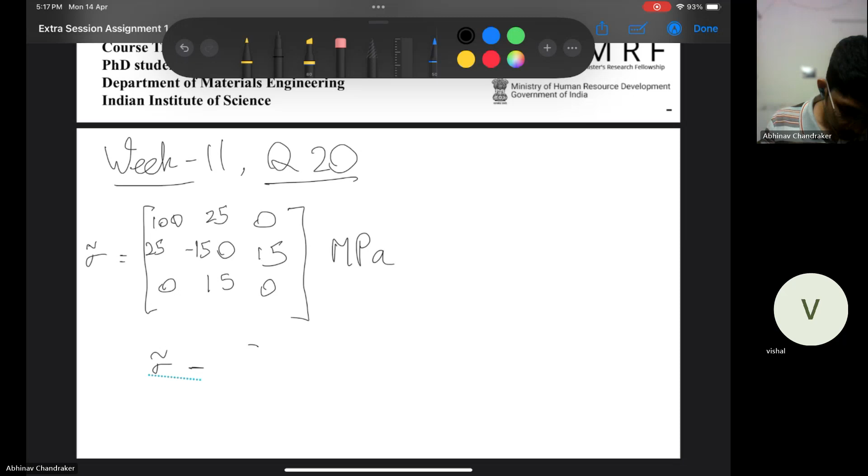Let me denote it by this. Sigma into I, equal to 0. What I was saying is you have to be able to get the principal stresses from this.

You need to make this matrix of 100 minus sigma. Let me make it bigger. And the determinant for this should be equal to 0.

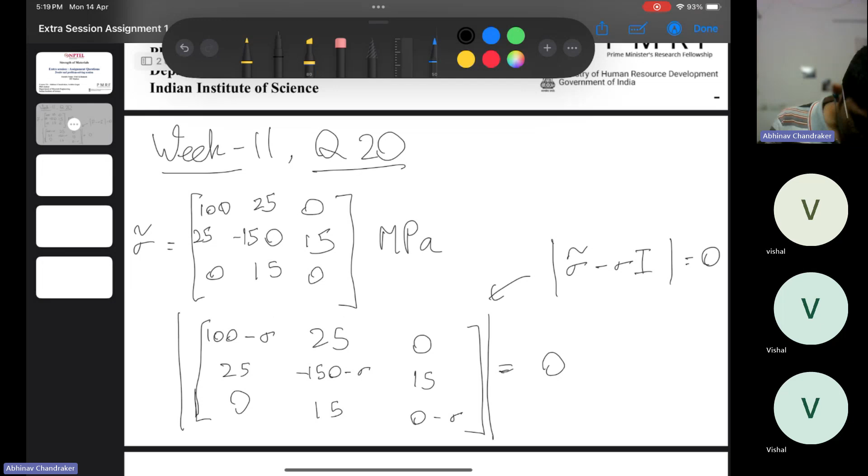From this, you will get a cubic equation which you will have to solve. Is there any doubt? Voice is breaking, Vishal. Okay, no doubts.

Let me quickly go to what that equation is, won't solve it directly here. So it is sigma cube minus sigma square into sigma xx plus sigma yy plus sigma zz.

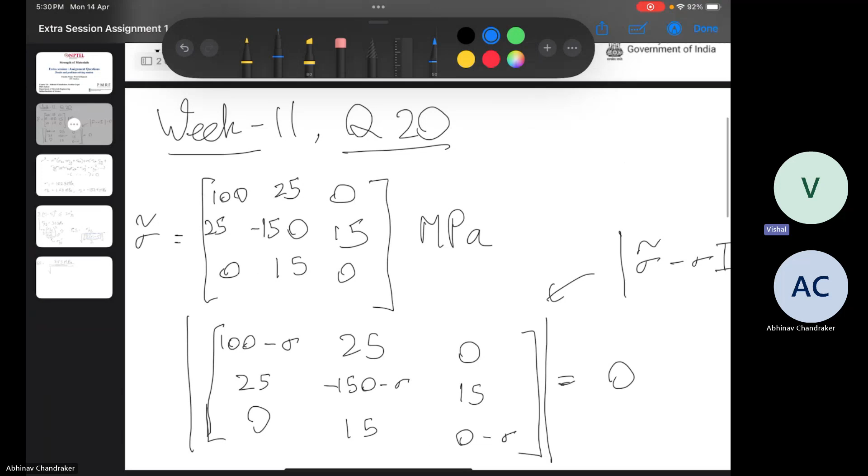Let's just do it again, let's see. Sigma 1... Vishal, did you also use a similar formula, or did you use a different one? I think the one you told was different, right? No sir, it was the same formula, this one only. So we have to do, in the place of sigma 1 minus sigma 2, we have to do all the three: sigma 1 minus sigma 2 square plus sigma 2 minus sigma 3 square, as there is in their formula. If we expand, hmm.

Okay sir, have you solved this question? I had actually calculated principal stresses, I did not check the von Mises myself. Now I am just adding it up, I'm doing the calculation. Okay sir, let's see whether it matches or not, let's see.

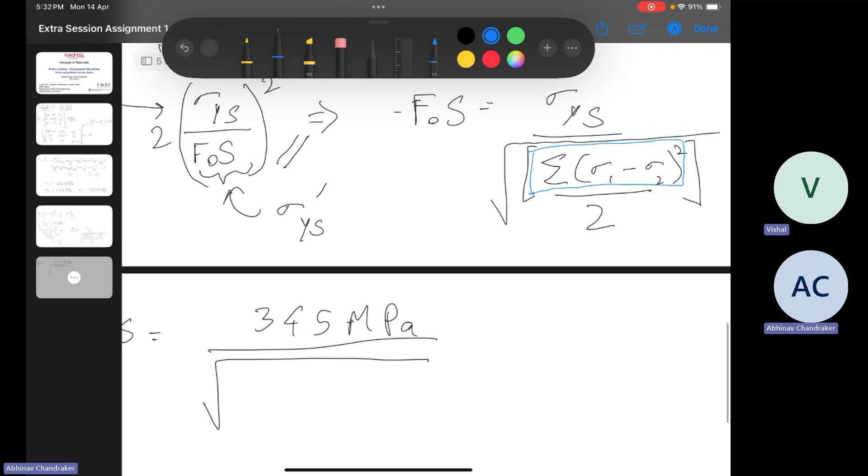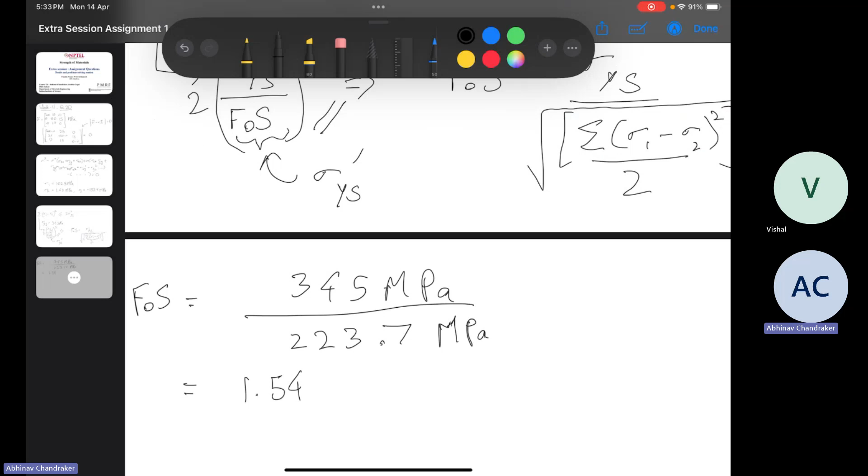So I'm getting it like this. Root of what I'm getting is 345 divided by 223.7. So this will become MPa. 345 divided by 223.7, 1.54. Is this the answer? Yeah, yeah. So I'm getting the correct answer only.

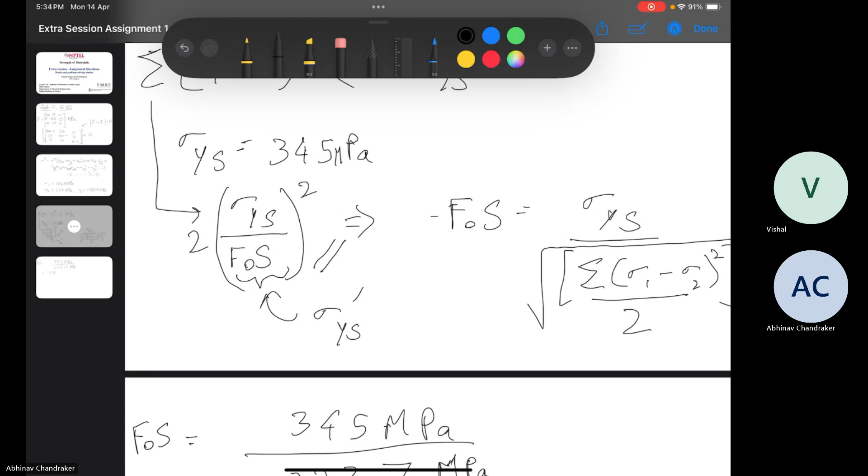Vishal, you are there? Yes, sir. So can you just check if this was the equation you used? Maybe you used some different one for your calculations. Sir, I used the same equation, but I got 2.18. Okay. I think I might have done wrong in using the calculator. Calculation issue might be there. Yeah. I'll quickly just write clearly what formula I'm using. Then maybe you can later check your calculation again. Okay, sir.

My laptop is on again. It had crashed.

Sir, my question is, while finding the three values of that characteristic equation, the three principal stresses, how will I do this in the exam hall, because there is no calculator. So are you allowed to take a scientific calculator for your NPTEL exam? No, sir. Only TCS calculator. Okay, the simple one, no? Okay.

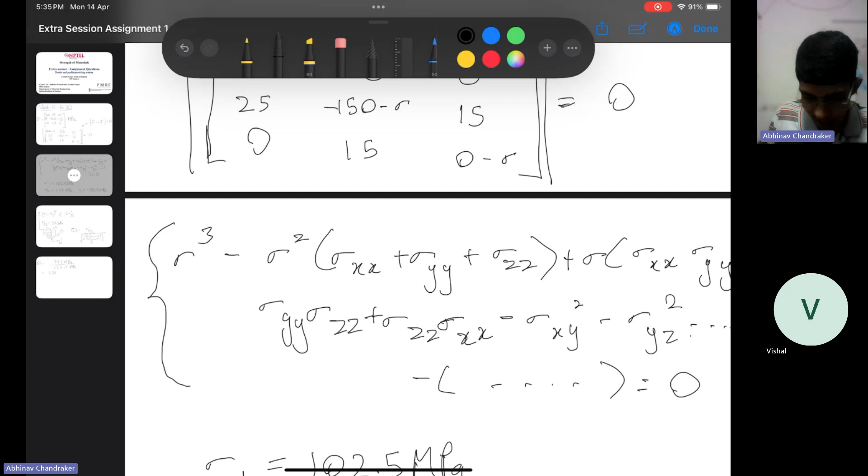Yes, sir. So actually this equation cannot be solved directly by hand. I also tried a bit. Then I had to use some online computational, like scientific calculator only. I think they won't give this kind of equation if they do not provide a calculator. They'll give you a simpler cubic equation where you can just input some guesses and find out the roots of that equation. Then you can do your calculations. Mostly they will not give you this kind of difficult cubic equation.

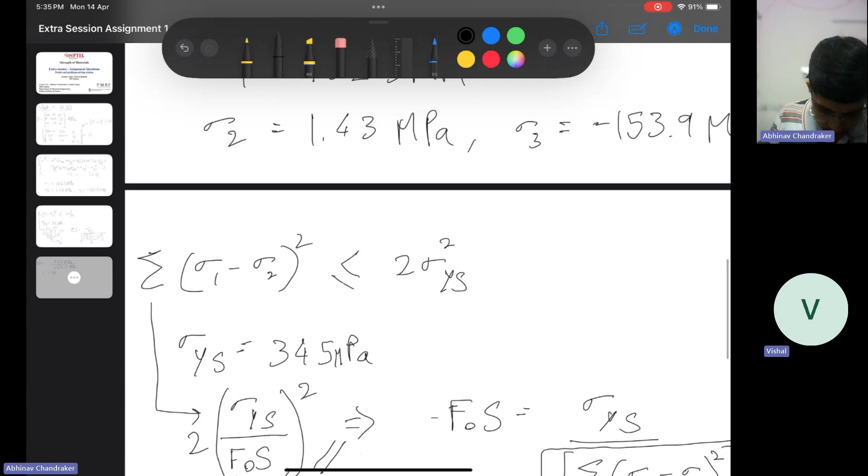So let me just simplify what I did. I directly wrote the equation here, so maybe some others might find it confusing. So what I did was, here you have sigma 1 minus sigma 2. This is your usual yield criterion for von Mises, 2 into sigma y square. If this is satisfied, that means it's at the edge of the yield surface. If the sum of sigma 1 minus sigma 2 whole square is more than this, then it will yield.

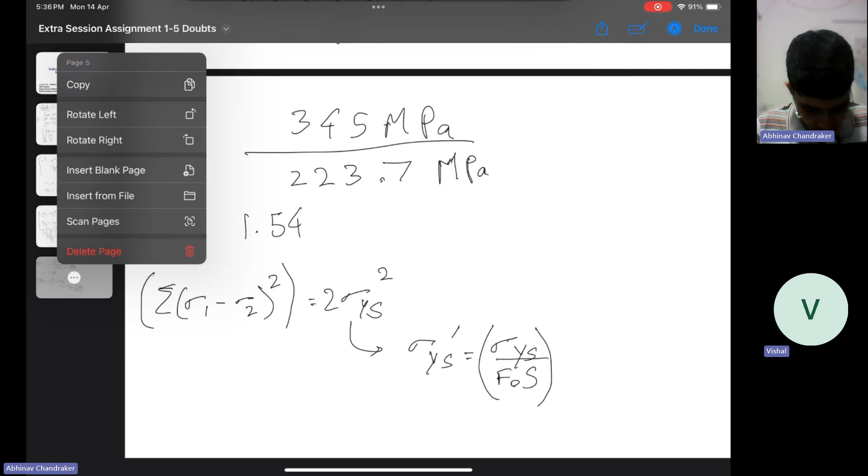But here, instead of sigma ys, we have sigma ys dash, which is a reduced value of yield strength, reduced by the factor of safety. And then once we put this value of sigma ys, we'll just do the calculations. That was all. So if this is fine, I'll go to the next question.

Yes, sir. Next question is week 8, question 8. Vishal, you only had asked these questions, is it? Yes, sir. Okay, okay. Then good that you are attending. In case you have any doubts, we can discuss on that.

So week 8, question 8, Archita also told me about this question. So here you have bending taking place, and the cross section after bending becomes like this for your beam. And it is asked what kind of stress is being experienced at the top. So I think there's some issue with the answer key for this. The correct answer should be tensile, because even in lectures, sir has taught that you will have a kind of deformation of your cross section when you do the bending of a beam. At the top, it will be something like this, and it will be tensile.

So I'll confirm with the TA who is in charge of all of these answer keys. So he'll take this up. In case of any clarification, we'll post it in the discussion forum. But very likely the answer is tensile for this. I'll confirm with the TA in charge.

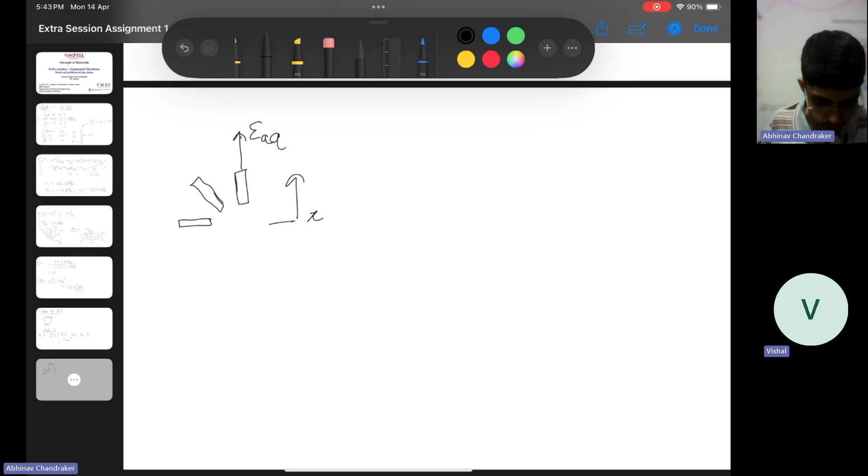Let me just write down. Epsilon a is in this direction. The measurement is in this direction. And this is x for us. This is y. This is epsilon c. Now we want to know epsilon xx. So for this, we have to do some transformation of the stress states.

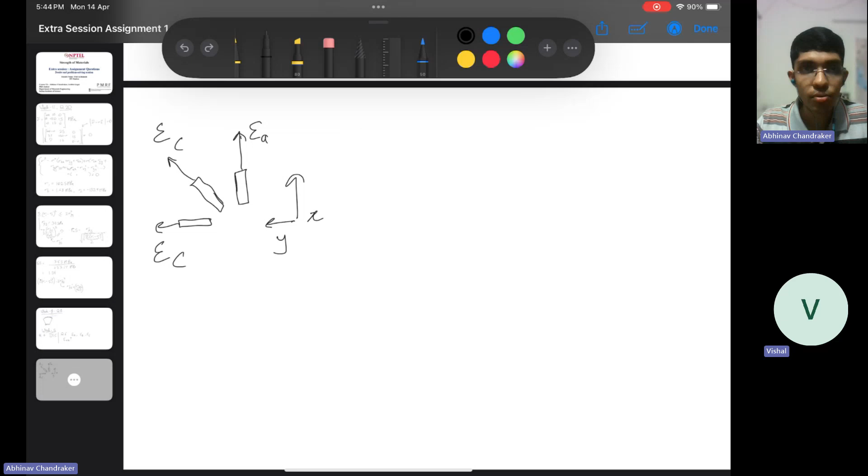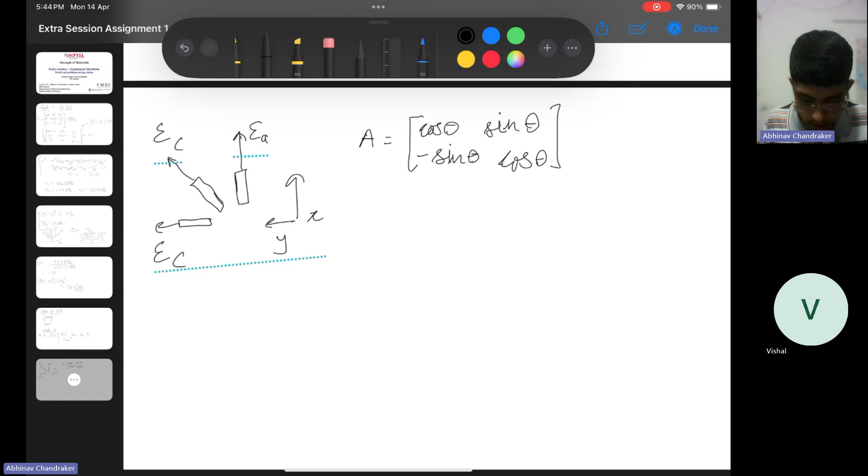Sir has shown it in his video lecture, so I'll quickly go to that. So it's something like this actually. You have cos theta, sin theta. Let's say this is equal to A. So how do we do stress tensor transformation when we are moving from one coordinate axis to another? If your initial stress tensor was sigma and your new one is sigma dash, then it will be A transpose into sigma into A, and here you are rotating by an angle of theta.

So same will be for strain. If the strain tensor needs to be transformed to a new coordinate system which is at an angle theta, then you do A transpose epsilon into A. And sir has already done the derivation, and he has shown that epsilon x will be equal to your epsilon A, and epsilon y will be equal to epsilon B, and your tau xy will be a function of epsilon A, epsilon B, and epsilon C.

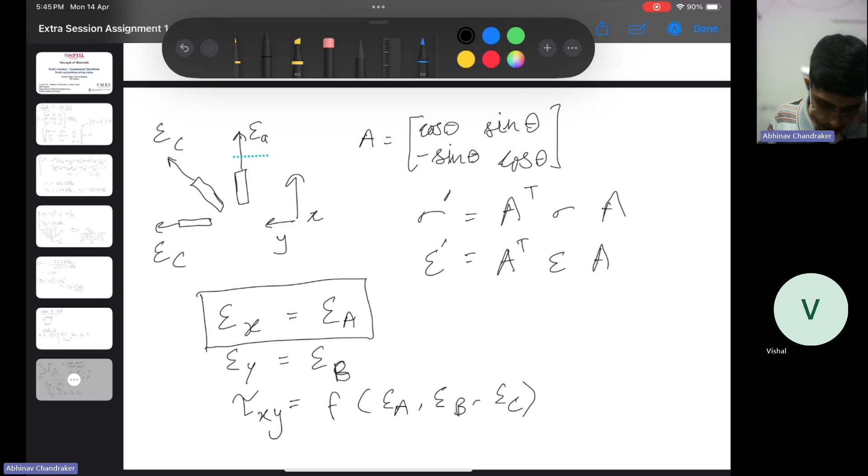Here we have just been asked what is epsilon x, right? So it will be the same as epsilon A. So the value will be 160 micron. Makes sense? And this is equal to 160 micron. If it is fine, I'll move to the next question. Sir, we have to find a strain. What is it we have written at the end? Tau xy. Yeah.

So normally, if you have any tensor, let's say you have a tensor like this, epsilon x, epsilon y, and here, sorry, tau means stress actually. I should write gamma here instead, or let's say epsilon xy. We are looking at strain components, so epsilon xy. So sir has shown a formula, and according to that, epsilon xy will be a function of the strain values you are getting at A, B, and C, and you are looking at components in particular directions, right?

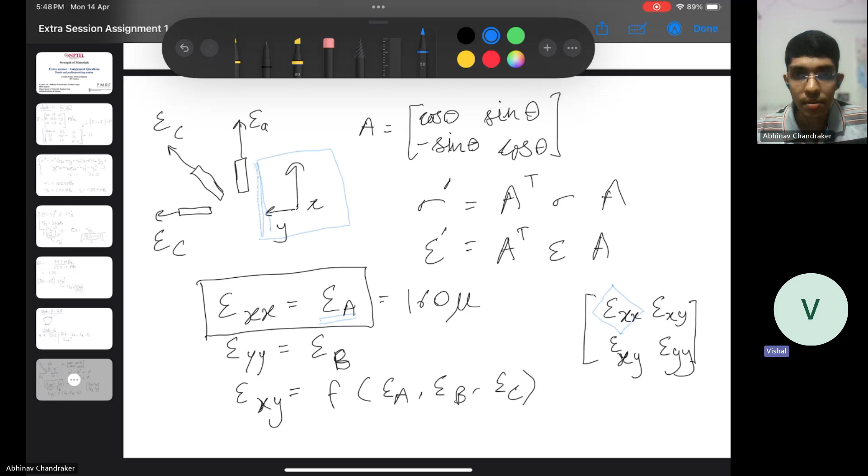And sir, if we are asked to find epsilon xy, then we have to find the function of epsilon a, epsilon b, and epsilon c. How will we do that? Okay. How we do that? So let me just go to the portion in the slides which has this. You can see my window. So this is week 5 content.

Sir, your window is not visible. Now you can see? No, sir. Okay. Sorry, I think I didn't get it. Now I hope it will be visible. Yes, sir, it is visible now.

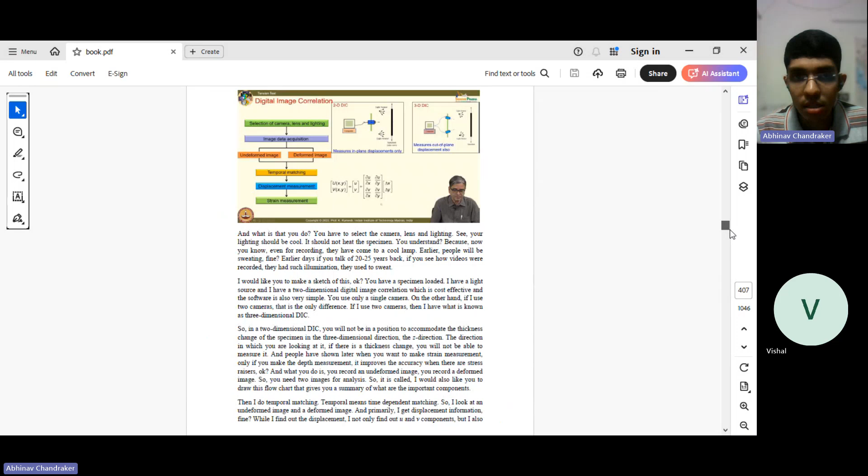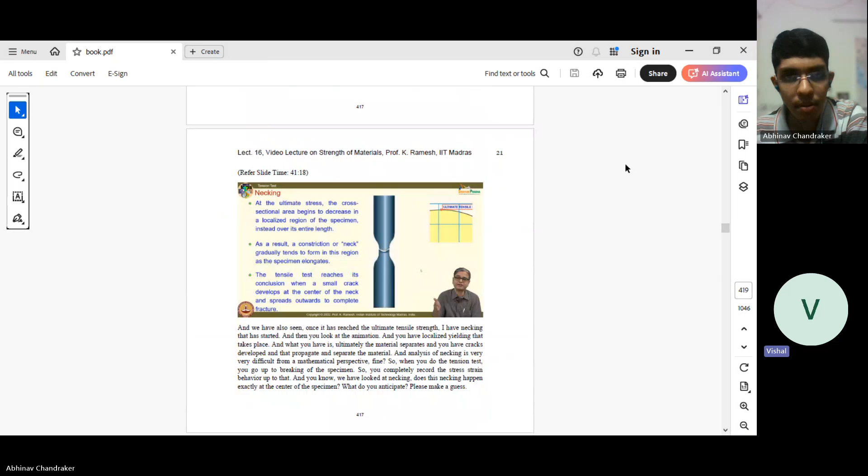So we go to strain measurement lecture. Lecture 15. I'll just write it down here. And here if we see, sir has done the derivation of how you can calculate gamma xy or epsilon xy. So it should be somewhere here. Relations. Strain gauges. Okay, it's not in this. I think it's in this one.

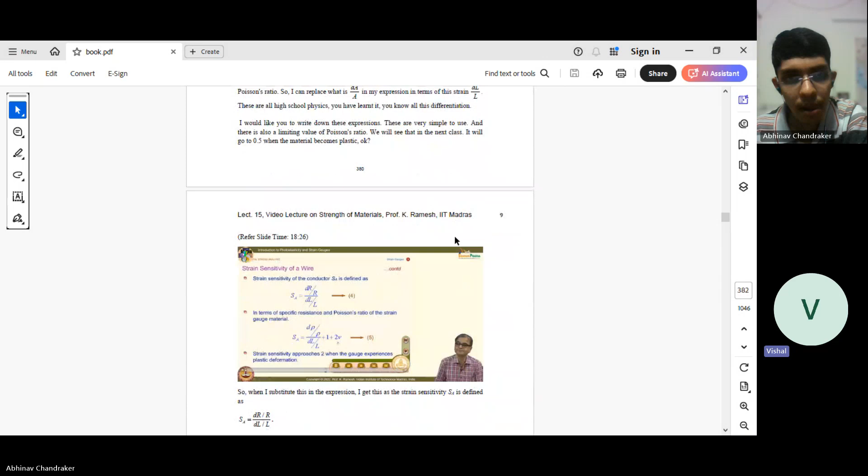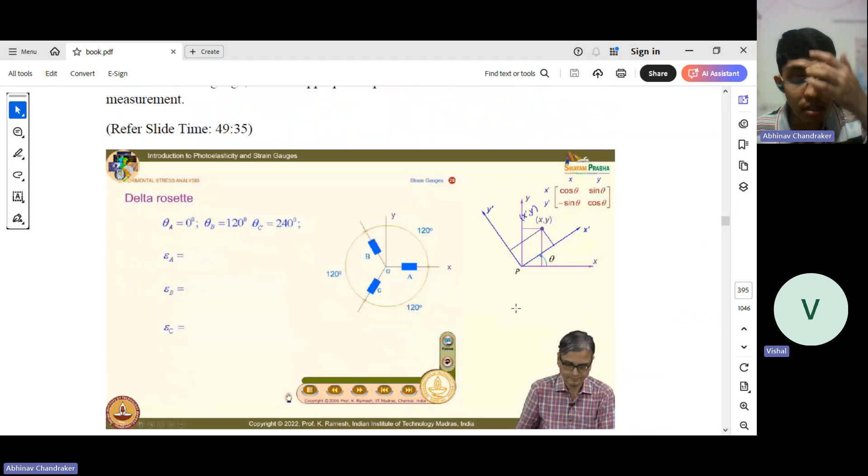So there are two kinds of arrangements that can be there. One is this one. I think it's called rosette. Yeah, three element rosette. And there is one which is delta one. So this is the delta rosette one, and there is rectangular rosette. So just look at this later on to understand the derivation for it. It's very simple. You just do stress tensor transformation.

Sorry, strain tensor transformation. You assume that you have an initial starting strain tensor which is like this, which is for the xy coordinate system. You shift it by theta, and once you shift by theta, for example, you had epsilon x dash, right, after shifting to theta. So you find out the value of that by putting in the value of theta in your strain transformation equation. Let me just write it down. Maybe it will be more clear.

Do you understand the derivation for this, or should I explain? Sir, if we are asked to find it in the direction of B, then it will be addition of purely B that is given, around 100, plus we will find the angle derivation of C and A by putting theta as 45 in both cases. Yeah. Sir, what will be the angle sign convention? If we are doing clockwise, then we have to give positive or negative?

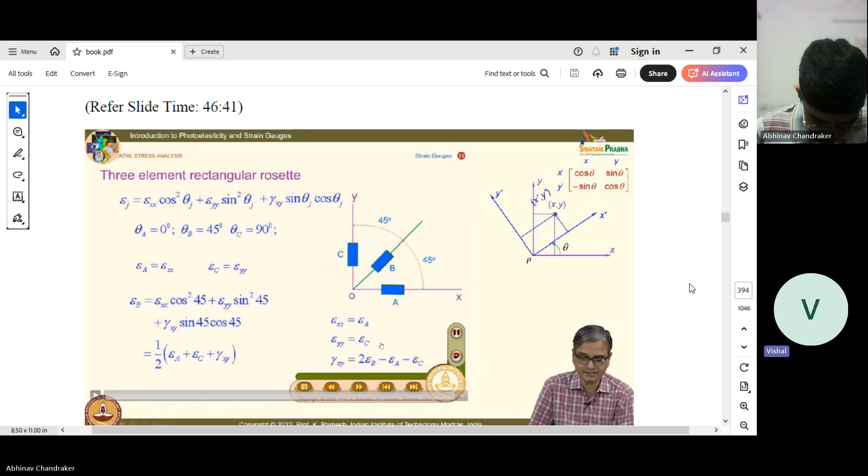So here you had three strain gauges at 120 degrees to each other. Let's call them epsilon A, epsilon B, epsilon C. And now you have been told that if this is your x direction and y direction, what is your value of gamma xy?

So how we'll approach it is, if you have this as your strain tensor epsilon xx, epsilon xy, epsilon yx, epsilon yy, then you can rotate it by any angle. So let's say we try to find out the epsilon B value. This is at an angle of 120 degrees. So if this is our x and this is our y direction, we want to rotate by 120 degrees. Our new x, which we call x dash, will be at 120 degrees and parallel to your epsilon B direction.

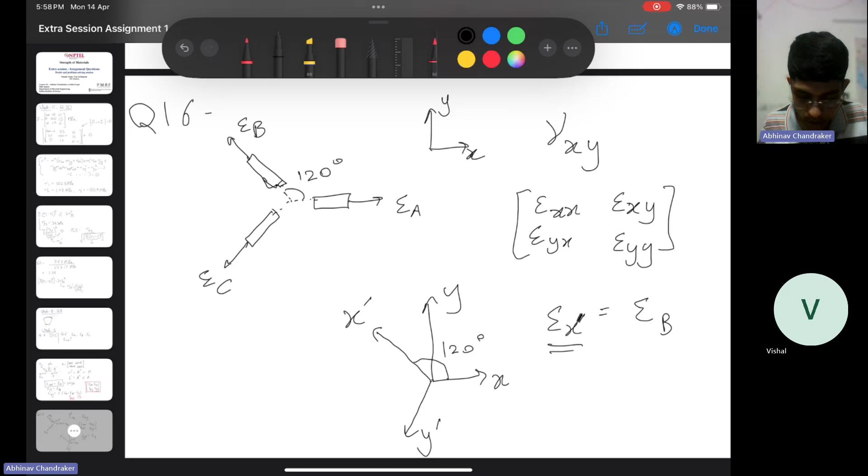Okay, this is y dash. So epsilon x dash should give you the strain value you are measuring in strain gauge B. The normal strain along direction B should be equal to epsilon x dash. So all we need to do is rotate the strain tensor by 120 degrees, find the new value of epsilon x dash, and equate it to epsilon B. So let me do that quickly.

We already know the strain transformation equation. It is epsilon x dash equal to epsilon x cos square theta plus epsilon y sine square theta, plus gamma xy sine theta cos theta. So I'll plug theta equal to 120 degrees, and the value of epsilon x dash I get will be equal to epsilon B. So we can directly write that epsilon B is equal to epsilon xx times, cos 120 degrees is minus 1 by 2, so cos square will be 1 by 4,

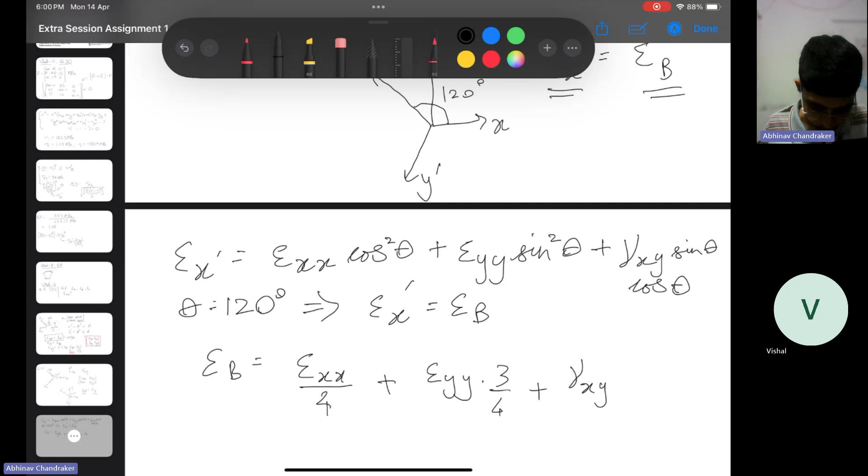plus epsilon yy into 3 by 4, plus gamma xy. And here gamma xy is nothing but 2 times your strain component. Gamma is the shear strain, I think, so gamma is equal to 2 times epsilon xy. I can't recall the exact name for gamma. And as per this equation you will have into sine 120, which is root 3 by 2, and cos, which is minus 1 by 2. So this will be equal to epsilon xx plus 3 epsilon yy minus root 3 gamma xy, by 4.

Similarly, we'll do it for epsilon C. For epsilon C, theta equals 240 degrees. If we put theta equal to 240 degrees, the values of cos square and sine square will be the same. Just the sign of sine theta will be negative, so sine 240 will be minus root 3 by 2. So it should be epsilon xx plus 3 epsilon yy, and instead of minus root 3 you will have plus root 3 gamma xy, because sine 240 is minus root 3 by 2 and cos is also minus 1 by 2. This divided by 4.

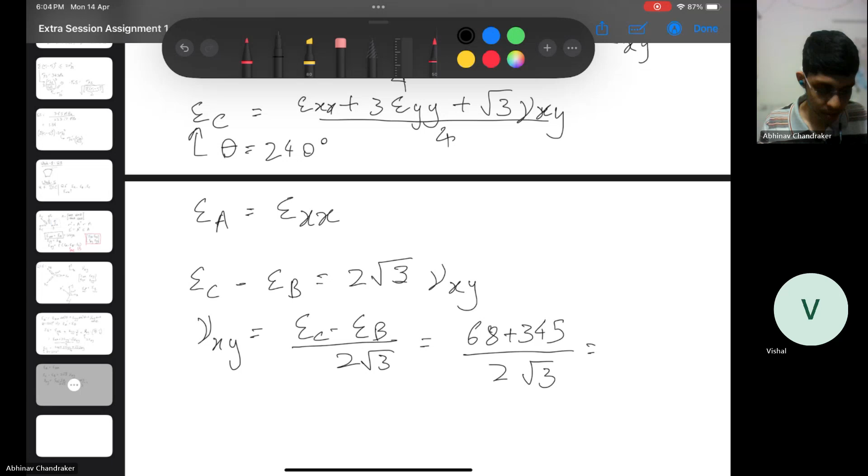And gamma xy will be equal to epsilon C minus epsilon B by 2 root 3, which is equal to 68 plus 345 by 2 root 3, equal to, is coming as, okay, I'm getting a different answer.

Okay, there is this also 4 that we missed here. 2 root 3 by 4 actually. So this will be into 4 here. The 4 in the denominator, I just missed it. So I'll write it here into 4, and this will also become into 4. So this becomes equal to 476.9 megapascal.

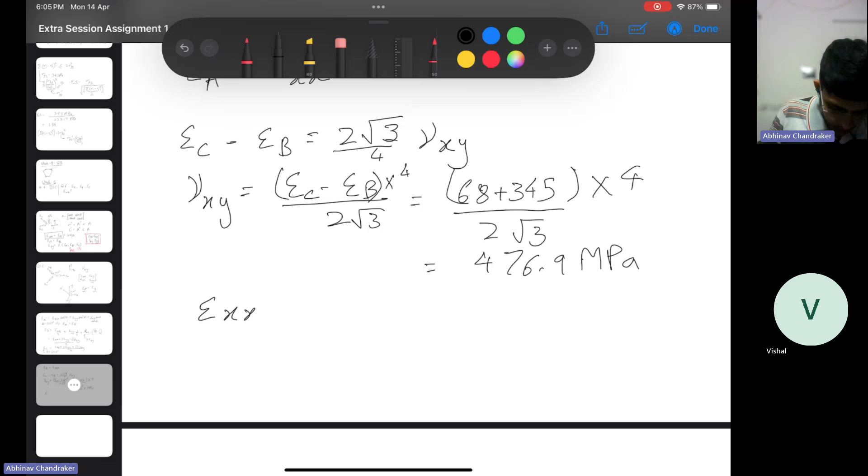In this way, once you know gamma xy, you already know epsilon xx directly. You can know epsilon xy also by using these three equations. So this is your first equation, this is your third, theta equal to 240, and this is your second. Okay, sir. Based on these three equations. So we are just doing rotation of the strain tensor. We know the value of strains along certain directions, we rotate our coordinate system to those directions and then see what will be the transformed strain tensor. After that it's just some calculations you have to do.

So that was question number 16. Next we have 13 and 6. I'll hurry a bit because we have more questions left. Question 6 we have already done, so 13 only. 13 is: what is the percentage reduction in area if diameter... Question 13 is related to tensile testing. You have been told the initial diameter of your sample, 25 mm, and the final value is 24.94 when it has failed.

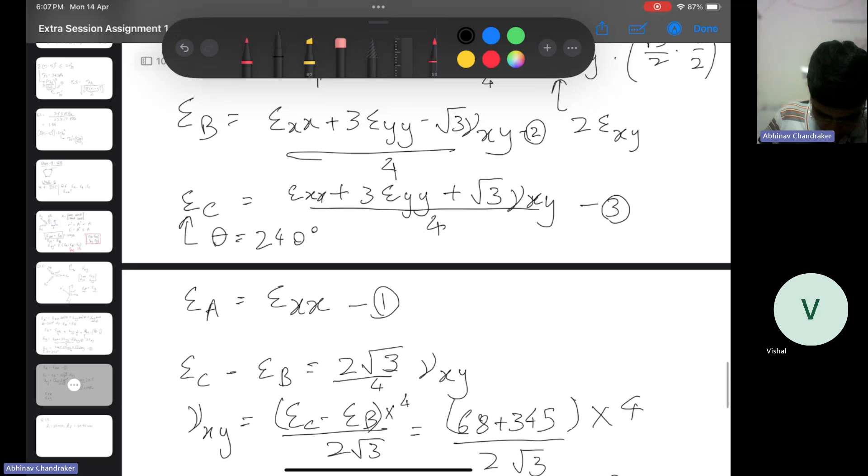I hope my handwriting is okay, else I'll try to keep it better because I'll be uploading these notes later, so I want it to be easy to understand. Yes, sir. Okay. So I'll try to make it a bit clearer.

So you have initial and final diameters given. We need to find the percentage reduction in area of cross section from start of test to the end of test. Do you know how to approach this, or is just your answer not matching? Sir, I haven't solved this question. I don't know how to solve this.

Okay. You are from a civil background, is it? Civil engineering? Yes, sir. Are you doing a PhD program or master's program or something? Sir, third semester, BTech. Bachelor's program. Oh, you're doing bachelor's. So lots of things will be new for you.

Yes, sir. So here I'll just give you some background of tensile testing. You have probably a dog bone kind of specimen; in ASTM it might be dog bone or cylindrical. Let's say you have some specimen like this and it has been pulled in two directions, and once it has failed, there will be some necking and some elongation. So it might have broken like this.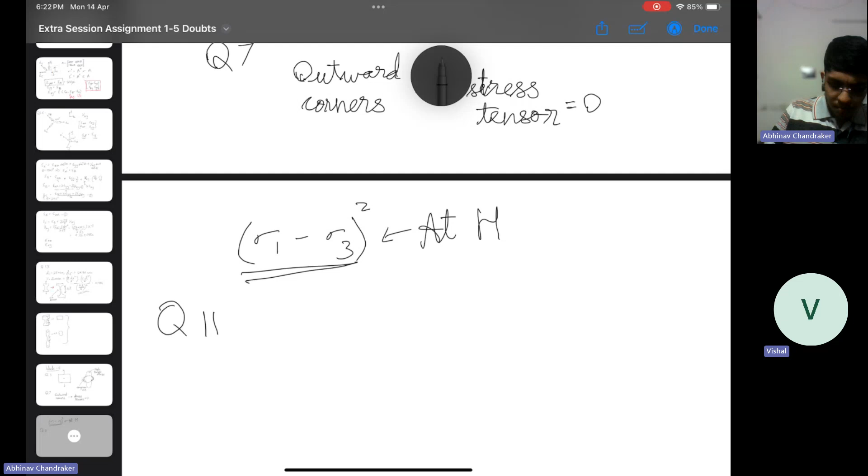Okay, so the way you can approach this problem is by understanding what a polarizer is doing. First, understand that both polarizer and analyzer, as sir also mentioned once, are actually the same elements, just situated at different places in your setup. First comes the polarizer, then comes your sample, then comes the analyzer. They are both the same elements only, just that one is before the sample and one is after.

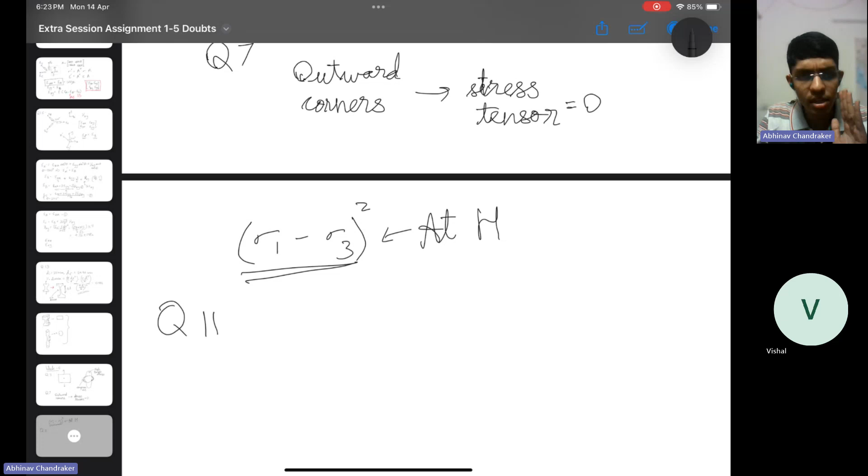And what they essentially do, in simple words, is filter out some part of your light wave. There will be certain directions of oscillation which they will filter out. So you can understand that if you put a polarizer, the intensity of the light you get will reduce. Same will be for the analyzer. Also, if you change the orientation between the polarizer and analyzer, that will affect the final intensity you are getting, because you are filtering out certain amounts of light waves.

If you've understood that, let's get to how the angles will affect the final amount of light you get. If polarizer and analyzer are aligned exactly parallel to each other - no difference in the angles of polarization - then the light filtered by the polarizer will go as it is through the analyzer. It will not get filtered again. But if the analyzer is at a high angle like 90 degrees with respect to the polarizer, then the light which came out of the polarizer will again get filtered, because the analyzer is at a different angle. It will filter some portion of the light, and what you get at the end will be much lesser, because it has been filtered twice.

And in between 0 and 90 degrees, there will be filtering, but less. So for the first situation, where polarizer and analyzer are aligned in the same direction, you will have the highest intensity, and for the last situation, where you have a 90-degree angle, you will have the lowest intensity. So based on that, for orientation 4, O4, you will have the least intensity, where you have a 90-degree angle between both of them.

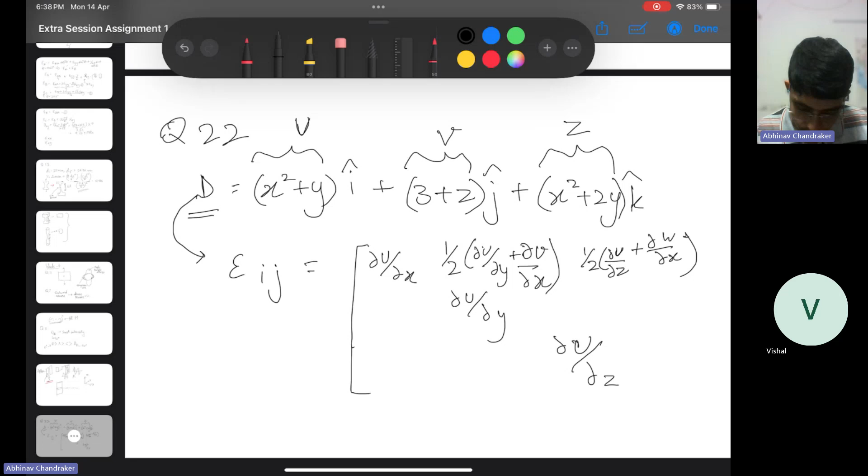So now you can write this strain tensor as dou u by dou y and dou v by dou x. Similarly, this will be half of dou u by dou z plus dou w by dou x. Here we wrote dou u by dou z because this is the shear strain we are looking at - we want strain in the x direction but with change in z. Similarly, dou w by dou x means strain in the z direction but as you are moving along x - change in strain in z direction as you move along x.

So if we use this formula, sir, will we find the A, B, C, D, E, F values? So similarly you can populate the rest of the matrix, it's a symmetric matrix.

And then about the major principal, we have to find the biggest and smallest value difference - yes, for the major. So from this you can know the strain tensor, all the values A to F. Then you will have to find the characteristic equation for this, from which you will get the principal strain values, and then use those. Here it is asked what is the principal strain value, so from that characteristic equation you can just find the roots and that will be your answer.

Okay sir, understood. This is actually a bit lengthy process - you have to find the eigenvalues by forming that equation and seeing the roots, but it should give you the answer.

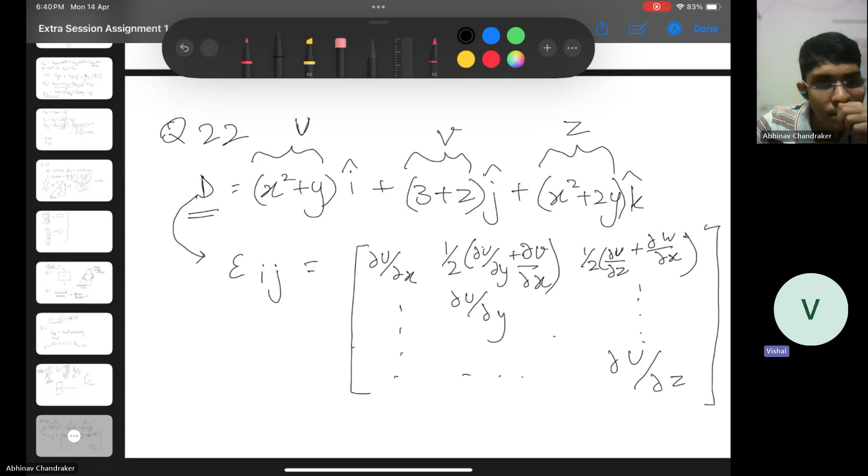So we have a 2D loading here, and it is given that the Mohr's circle is a point for this kind of loading. Your Mohr's circle is a point which is at plus 150 units on the normal stress axis. So here you could understand what the Mohr's circle will be. What are the axes for constructing Mohr's circle? On Y you have the shear stress, on X you have the normal stress. And it's been told that your point is at 150 units on the normal stress axis, so let's just mark this as 150. And this is your Mohr's circle - so here you just have a point.

We have been asked what will be the direction of maximum and minimum principal stresses. So here, how you can understand what exactly is happening. We know what is the value of principal stress and how you can find principal stress, principal strain, and maximum shear stress using a Mohr's circle, right? So from here you can see that there is just one point.

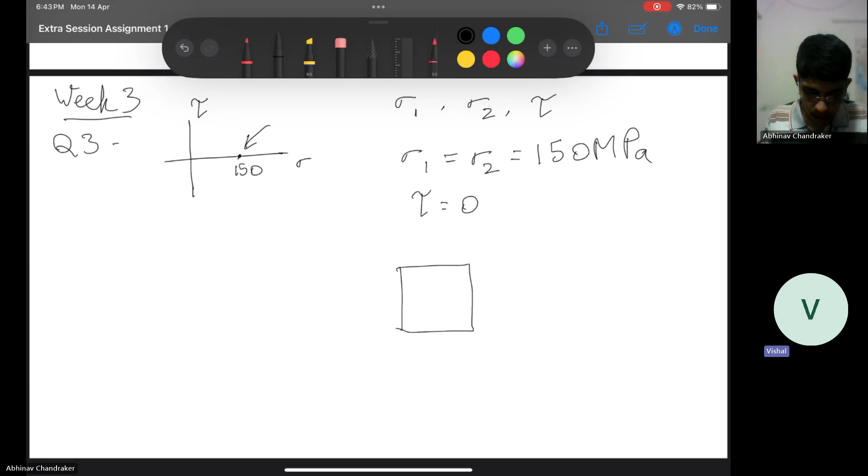So both of your principal stresses will be the same, right? And your tau will always be 0, right? From this you can say that your loading is something like this, 150, 150. It could be a biaxial kind of loading, right? And tau is 0, no shear stress is there.

Now, even if you rotate this in any direction, for example if you rotate it by 45 degrees, just by looking at the Mohr's circle, you can tell that still you'll have only normal stresses, which will have the same value. So this is kind of a hydrostatic stress state, just that it is in 2D, not in 3D. So this makes sense. You'll have, in all directions, the same normal stresses.

The uniform kind of loading stress state. So this will be fine at every angle, whether it is 22.5 or 45. Yes, at all angles it will be the same.

You can understand this just by looking at the Mohr's circle also, because the circle has shrunk so much that now it's just at a point. So even if you change your angles, which you usually use the Mohr's circle for, to get at a particular angle what will be the normal stress and the shear stress, in a way you are changing your element's direction and finding the stresses for that element. But here, since it's a point, it will always show the same sigma and tau values. Tau will be 0 only.

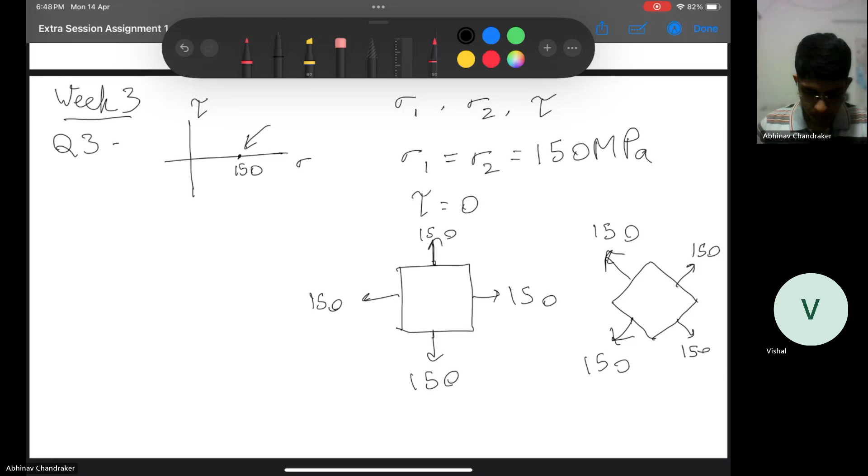In question 16, we have been given a stress tensor, and it is asked what is the value of sigma 1. Sigma 1 is your principal stress, the higher principal stress. So let's, okay.

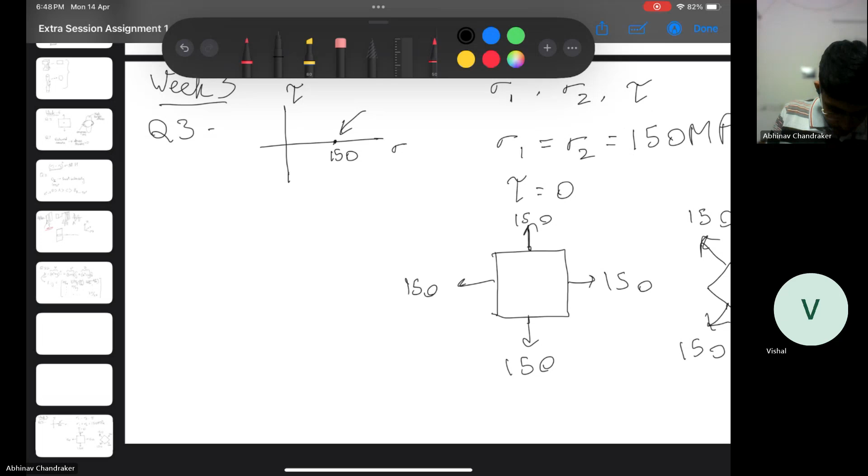Week 2 question, this is related to Mohr's circle only. We need to know the principal stress for a particular stress tensor that is known. So at your point 6 comma 10, if you put in the values of x and y, you will get sigma will be equal to. So you know how to approach this, Vishal? Yes, sir.

The answer is not matching, is it? Yes, sir. Okay, so let's just see. 3x squared y, so that will be 1080, minus x into y squared, and y cubed, 1000.

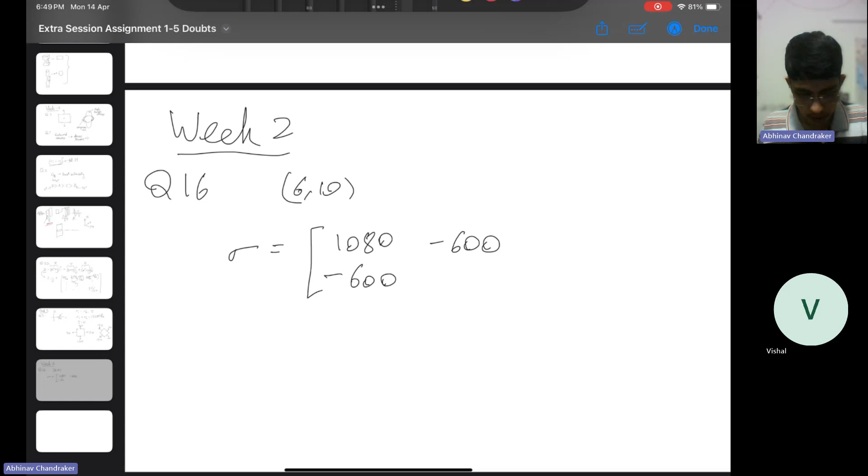And near Mohr's circle, you need to find sigma 1. I think sigma 1 was the formula for principal stress. So this is equal to sigma x plus sigma y by 2, plus sigma y minus sigma x by 2, the whole square, plus tau square, root of this, right?

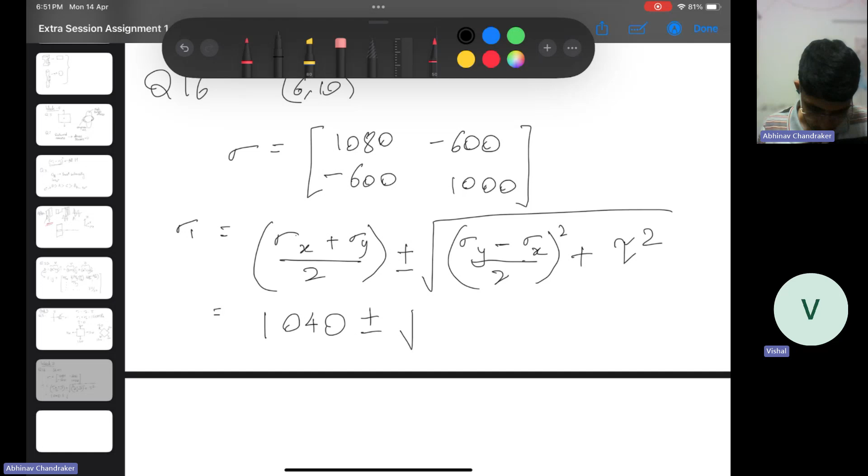Yes, this will become 1040 plus minus. So we are looking at sigma only, so just plus will be fine. Sigma y minus sigma x by 2, 1600, plus tau square. Tau is minus 600, so 600 whole square. So square root of this, so this is equal to...

What is the answer you were getting? Do you have it? It's around 2000. Okay.

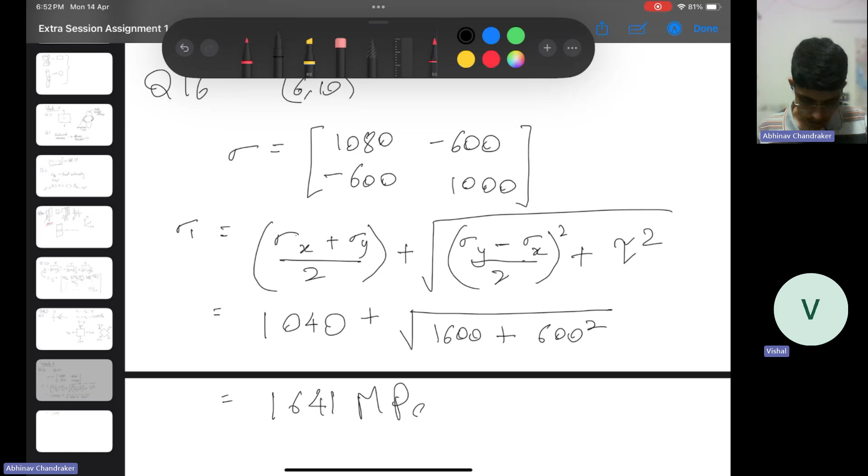So this will come to approximately 1641 megapascal. So this is correct. Yes, sir. It's matching. I think some calculation maybe you missed somewhere.

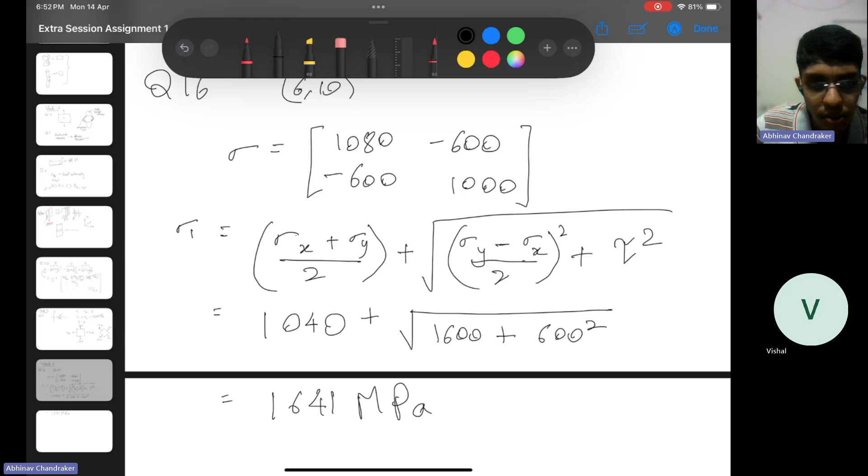Sir, question 21. This is fine, no? Question 21. Here also it's like this. So you know how to approach this question? No, sir. Okay. Here you have two rigid members which are glued at an angle. It has been told that the maximum shear stress and normal stresses they can withstand, those have been specified, and then you have to find out what is the maximum load, that axial load which it can endure.

So question number 21, no? 21. Okay, let's just find out what are the maximum shear stress and normal stresses which it can endure until it fails. So question 21. If we just look at the lower portion, there will be some normal stress sigma on it and some shear stress tau, and you are applying the axial load P. So sigma should be less than equal to 900 kPa, and tau is less than equal to 700 kilopascal.

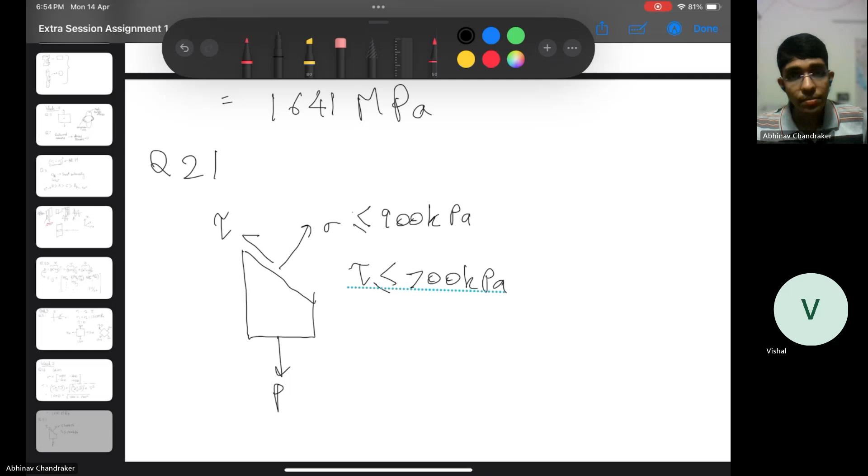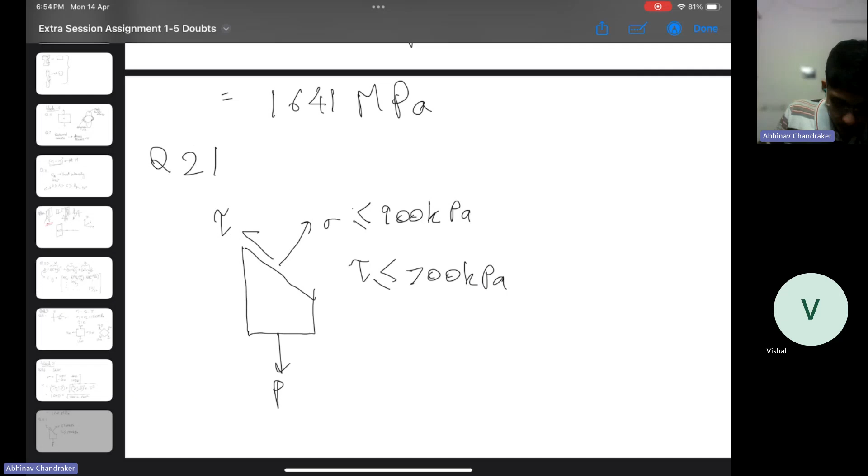And we have to tell at what value of axial load it will fail by shear, that is tau will become 700 kilopascal at which value of P. I think there are two ways to approach this. One is by just looking at the free body diagram for this. This angle is 30 degree with the horizontal. One way to approach is by just looking at the free body diagram. So you look at the components of the forces in the two directions.

So if this is 30°, then this will be 60 degrees, right? And this will also be 60 degrees. If you find out the angles, it will come out something like this. And if we balance forces in x direction, Fx equal to 0, which will imply tau sine 60° equal to sigma cos 60°. So tau equal to sigma into cos 60, which is 1 by 2, so sigma by root 3.

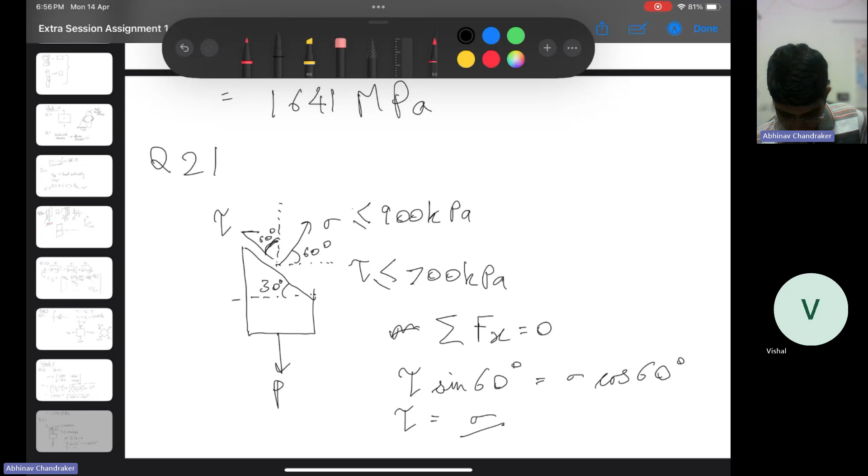Then we can... wait, I am trying to make a new page on this. It's not coming. Yes, so now you have relation between tau and sigma. When you do sigma Fy equal to 0, then you will have... this is week 2, right? So our time is almost up, but we'll just finish all of these and then finish.

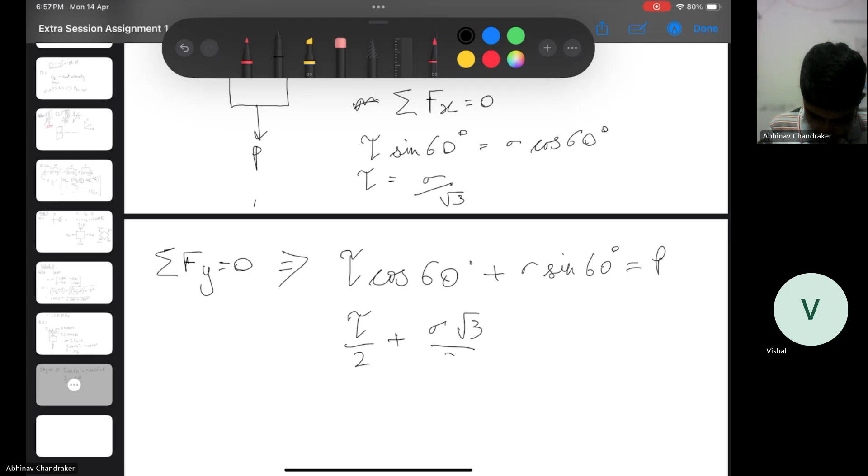So here you have tau cos 60 plus sigma sine 60° equal to P. So tau by 2 plus sigma root 3 by 2 equal to P. And you know here that for question 21, it is failing by shear, so tau is equal to 700. So you can just substitute the value of tau and sigma here. Sigma is equal to root 3 into tau, right? Okay, sir, I will do that. Yes, sir, I will do it.

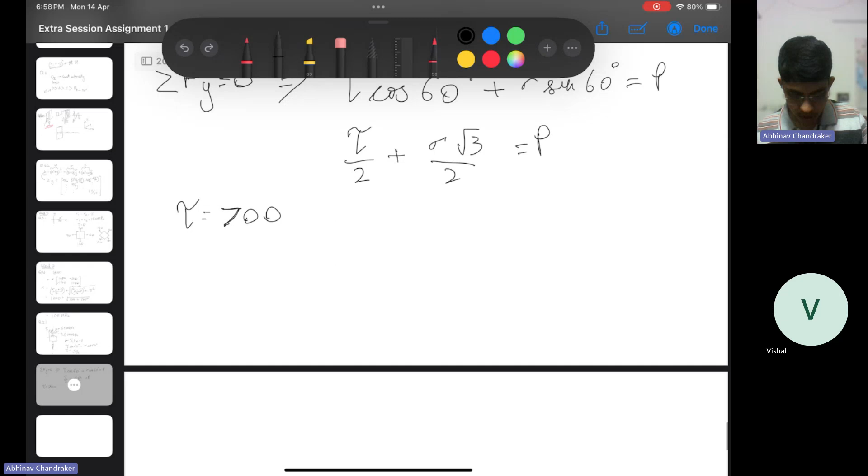So this is one way. There is another way of doing it, which is the more formal way, because here you did not use the concept of strain tensor, right? Yes. You just tried to resolve the stresses. But another way is if you write the stress tensor. We are dealing with loads here. So if you write the stress tensor, here you have your coordinate system. So this is method 2. Your coordinate system is like this, x and y.

And this is the more formal method, the proper method as per what concepts you have been taught. So here your loading is in y direction, right? So sigma x is 0, sigma y is equal to the stress associated with P, and your tau is 0. It's like a uniaxial loading, right? And what you have been asked is if you have an element which is at an angle of 30° with the horizontal, then what will be the value of sigma and tau for this? It makes sense? Yes, sir.

So for this, it is 30°, then this is 60°. How you can approach this is, you are rotating this element by 60°. Rotation by 60°. And so this 0, 0, P after rotation will become some epsilon x dash, epsilon y dash, tau xy dash, tau yx dash, right? So you rotate it by 60 degree and find out. And here, which element will you use? You want along x direction, right? The new x direction is of use to you.

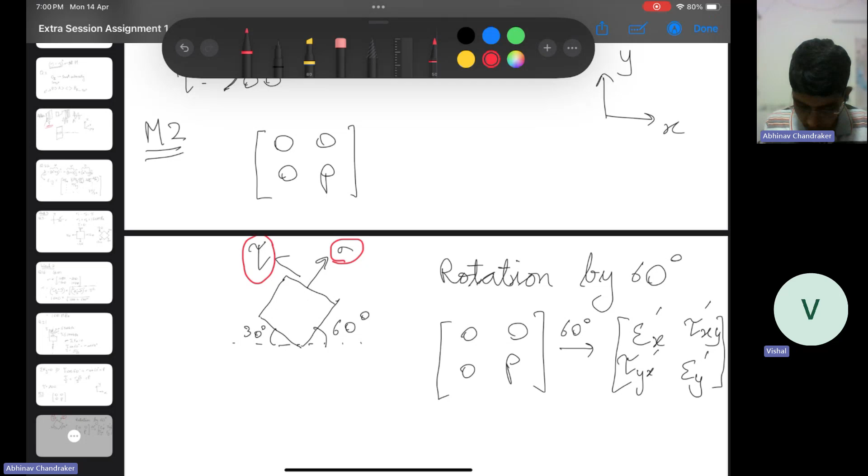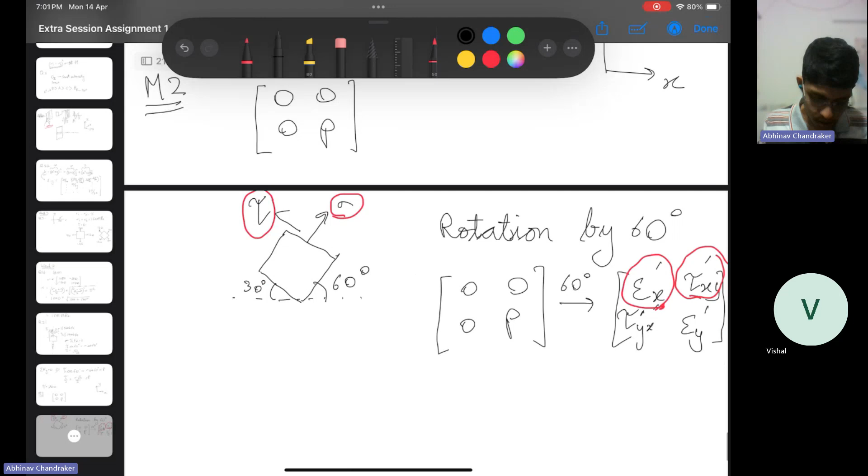So you'll use epsilon x dash and tau xy dash. Those will give you the values of normal and shear stress along the cut that you have, which is at 30 degrees with the horizontal, right? Yes, sir. And you know how to do rotation of your strain tensor already, by multiplying with the transpose. You multiply with that rotation matrix, right? Okay, sir. So by this, if you do, you'll directly get epsilon.

Here you have been asked what is the value of shear stress. So you'll directly get tau dash xy, and you can use that value. Okay, so this is fine. We'll proceed.

Sir, I have a few doubts from week 12, sir. A few questions. Week 1 is fine. Yes, sir. Okay, week 12. You can ask me. Sir, in question 9. Week 12, question 9. 6, 7, 8, 9. Okay.

Sir, I am confused between zone 1 and zone 3. Zone 1 and zone 3. The beam is undergoing pure bending in which of the following? So in pure bending, you know what kind of fringe pattern you should see, right? Straight parallel lines. Parallel lines, right? In pure bending.

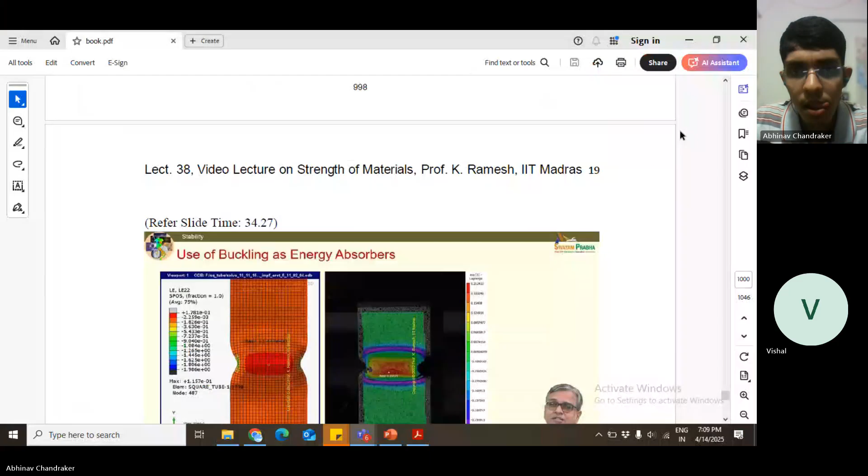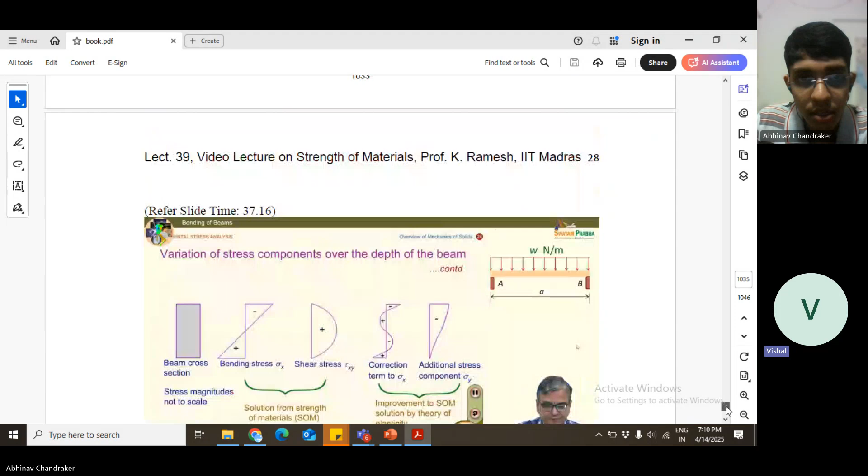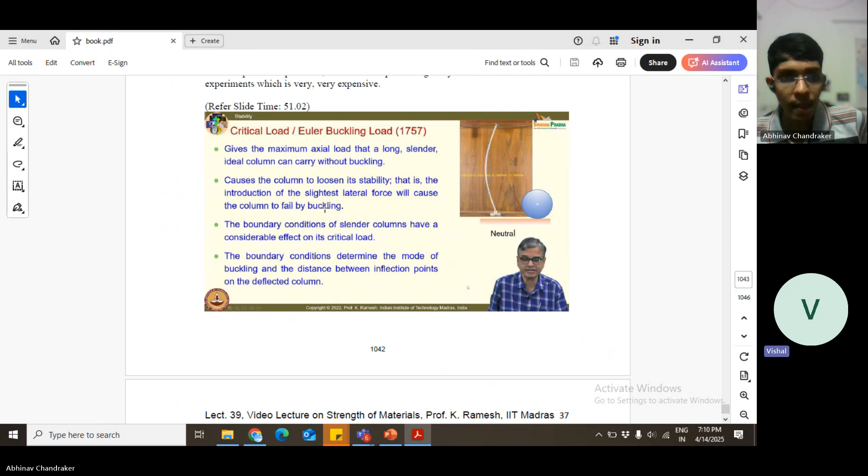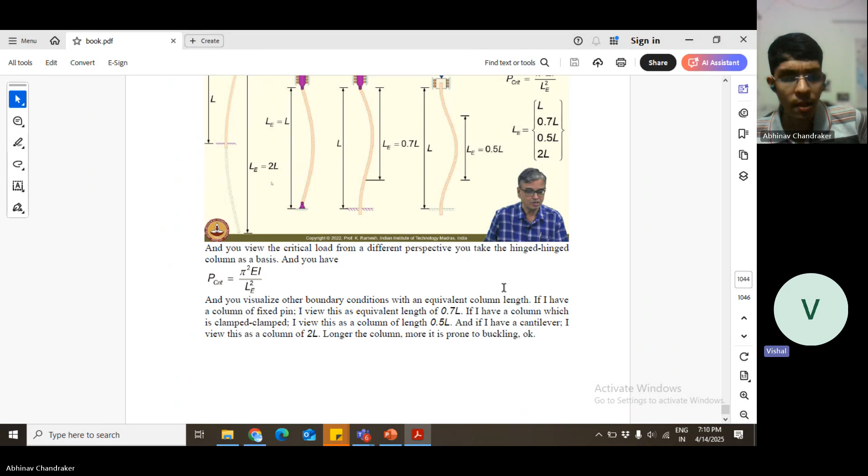Actually, I had not seen this lecture, so I was confused. Sir, it is 0.7, no? The third one. Based on the boundary condition, sir is saying that you can change the value of equivalent length so that you can use the same formula for all kinds of boundary condition. Sir, as per the question, our case is the third one, right? One end is pinned, one end is fixed. So if I have a column of fixed pin, is clamped.

Well, okay. Third one is 0.7 L, yes. But third one is the hinged one. Yes, sir. Fourth one is the one where you have it pinned. So in here also you have the hinged one only. So it should be 0.7. Yeah, Le equal to 0.7. So this formula you can use. Sir, and the method of approach for question 7. Okay.

Method of approach. Rectangular plate, small hole, far field stresses. Actually, here sir has directly told what will be the stress distribution, right? As a function of r and theta. You can see the formula he has written, sigma theta theta equal to sigma xx into this. So it will be maximum at 45. No, at 45 it will not be maximum. Just try to put theta equal to minus 90 degree or theta equal to 90 degree, what will you get?

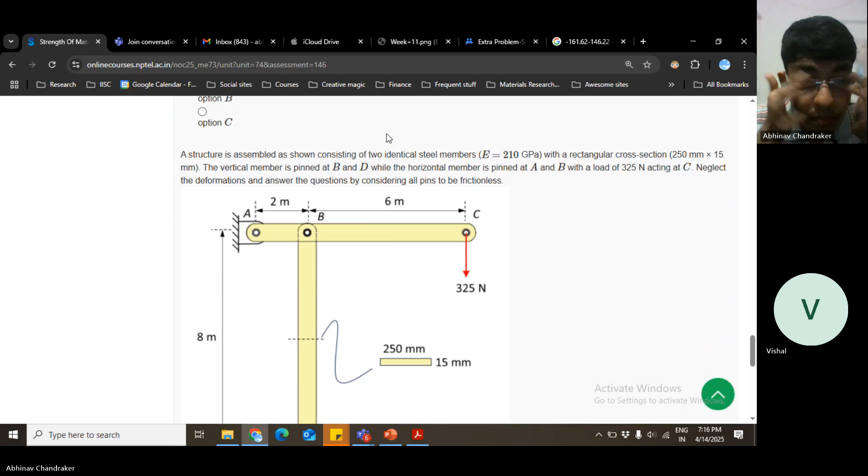So do I put the negative sign or only the magnitude in the minimum hoop stress? Minimum hoop stress, you should put the negative value. It will be a negative value, yes. Okay, sir. So in question 17, what will be the method of approach? The compressive load, the structure is assembled as shown with a rectangular cross section. The what?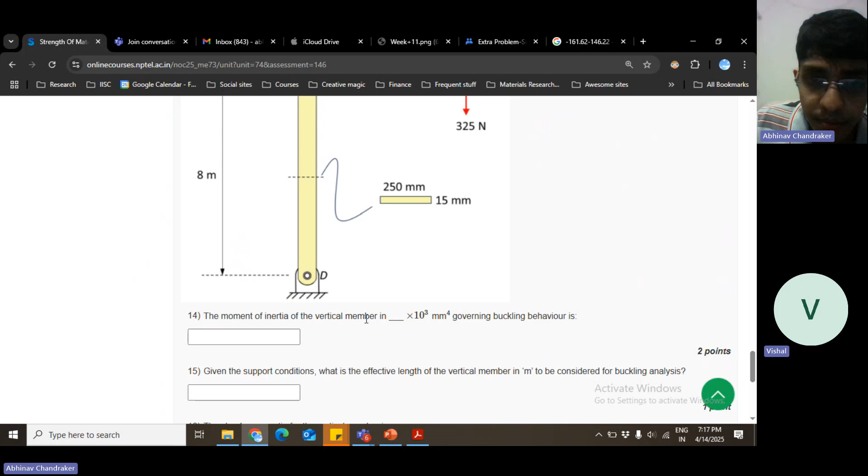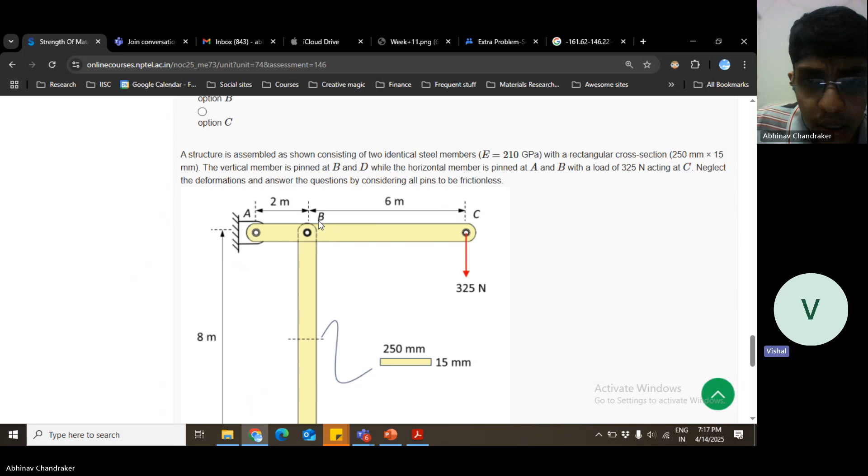Sir, the moment of inertia in question 14, we have to take the minimum, no? For buckling, question 14. Yes, governing buckling behavior, so it will always be the minimum one. Sir, at point B, there is an axis given, a dotted line. So I don't think we have to take the minimum. Okay. So I think the buckling will be in only one direction. I'm not sure.

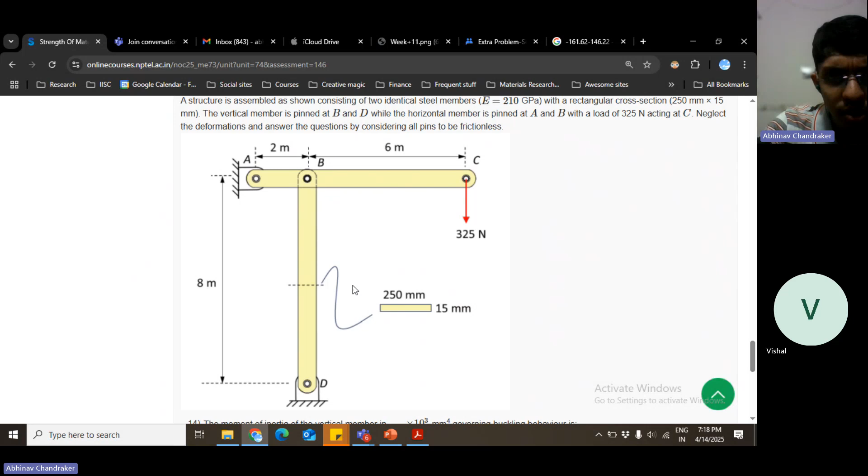No, no, it's not necessary. So, like if you have this, the buckling, see, it's like a column. Okay, your BD, this is a truss, right? So your BD truss, you can consider it as a column, and you are applying a compressive load from the top. So it can either buckle in the x direction or the y direction.

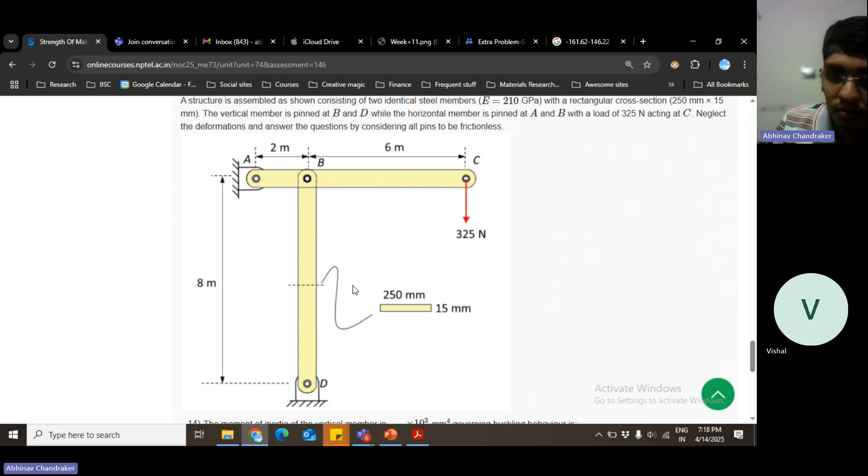If you're applying from z, or let's say you're applying from y, it can either buckle along x or along z, right? So you will need to see along both axes which has the lowest moment of inertia, and that you will use, because it will have a higher tendency to buckle along the direction which has the lower moment of inertia.

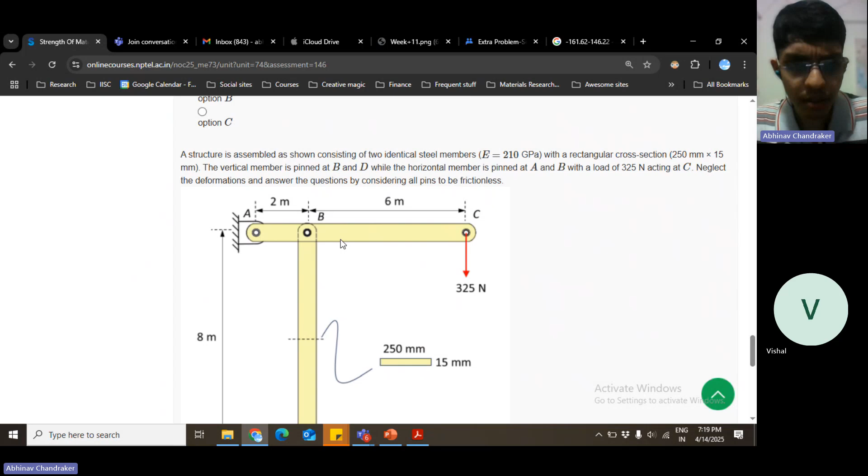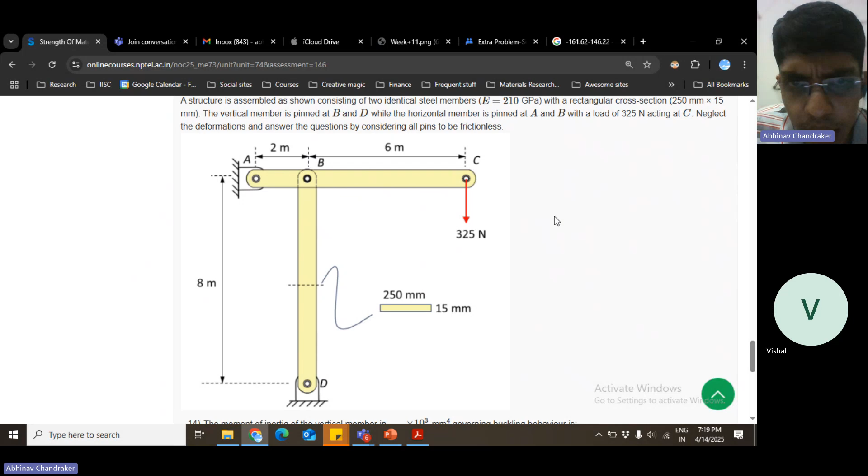Sir, is point B hinged or fixed? Point B is connected to truss AC by a kind of joint. So it can rotate about point B. It can rotate about point B. But here you need not really consider what kind; it's actually a joint which can rotate, just like you have in trusses, right? In civil engineering, I think you study a lot of trusses.

In materials, we do not study them. I just have a little bit of understanding. So it is pinned at B. The vertical member is pinned at B and D, it's written in the question, while the horizontal member is pinned at A and B. So pinning means that there can be relative angular rotation between the two.

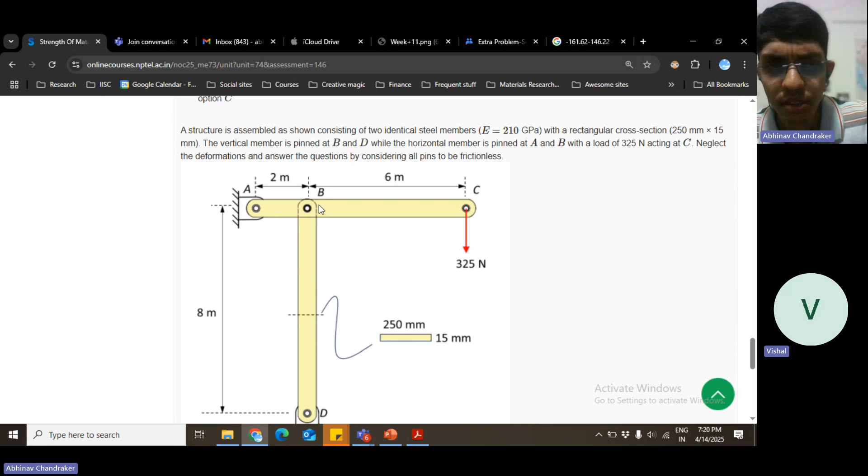Sir, but the pinned point has to be fixed to both of those two points; a point in a truss has to be fixed for that truss. Yeah. You got it? Like, what was your question?

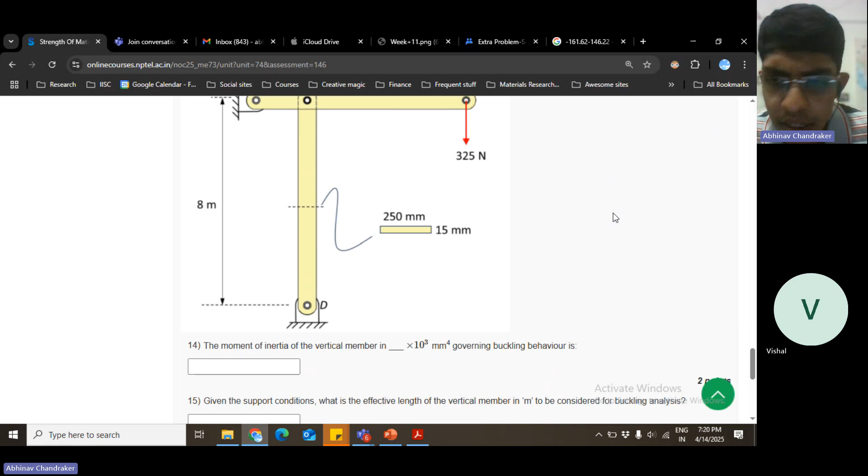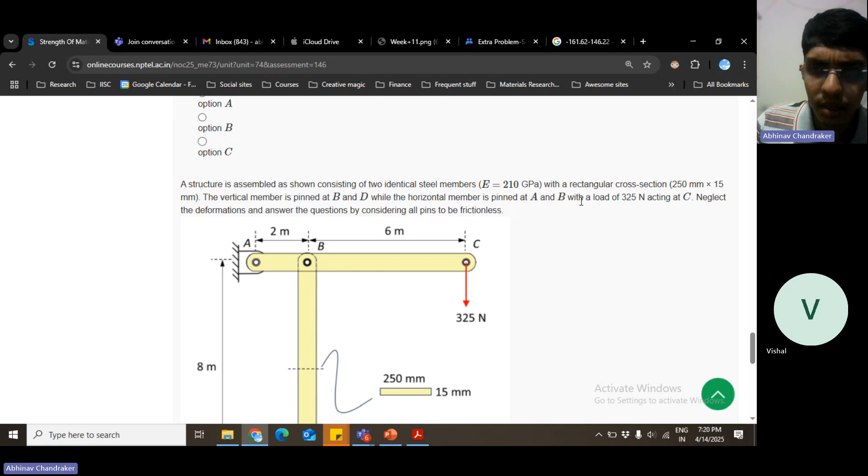Hi, Vishal. Sir, in question 17. 17. So what compressive load? The compressive load N acting on the vertical member loaded as shown. So what is the compressive load that will act on the member, on the vertical one? The vertical member is pinned at B and D while the horizontal is pinned at A and B, with a load of 325 Newton acting at C.

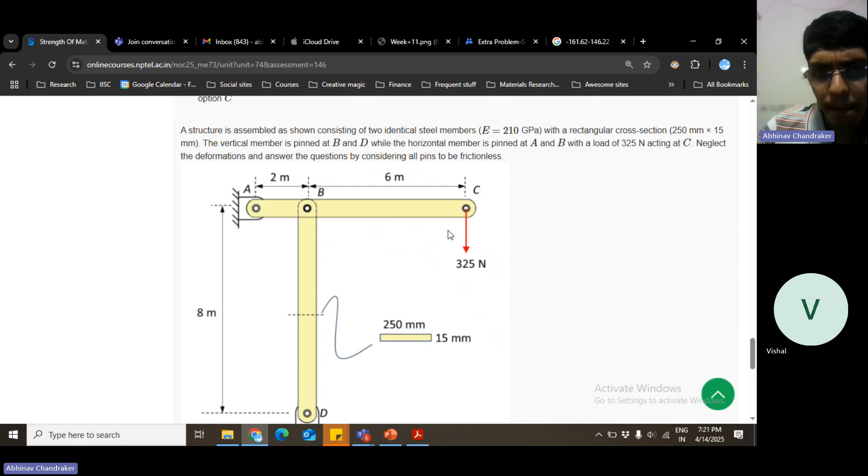So here you have to find the critical compressive load. Here you have already been given the value of the load applied at C, right? So you just need to know what will be the compressive load at B, which is experienced by the truss BD. So basically, what is the load in the negative y direction on the joint B?

Free body diagrams. Firstly, you can make one for AC. See what will be the forces at point A and at point B. Then you make it for BD. For each member you can make one. At the joint also you can separately make one. So if you make the free body diagram and do the moment balance and force balance, you will be able to get the force on the truss BD at point B, and that will be a compressive force.

That value will give you the answer to question 17, and then you have to find out the critical value, which will be based on the equation sir gave for buckling. So 17 is just based on doing the free body diagrams correctly and doing force and moment balance.

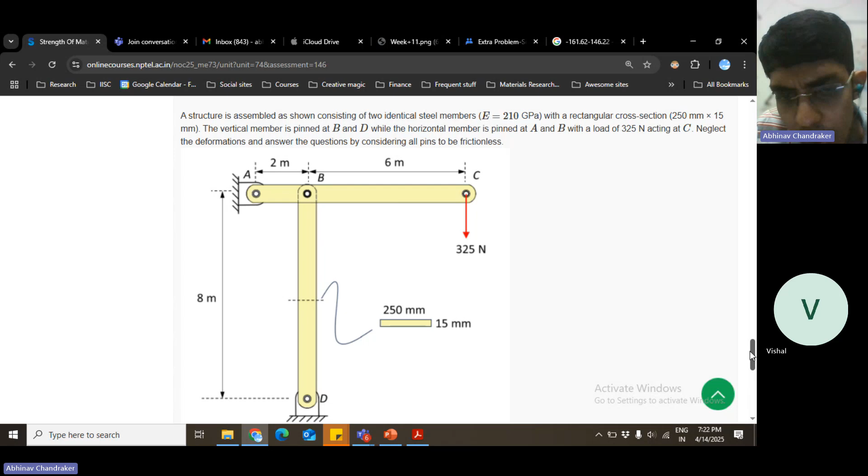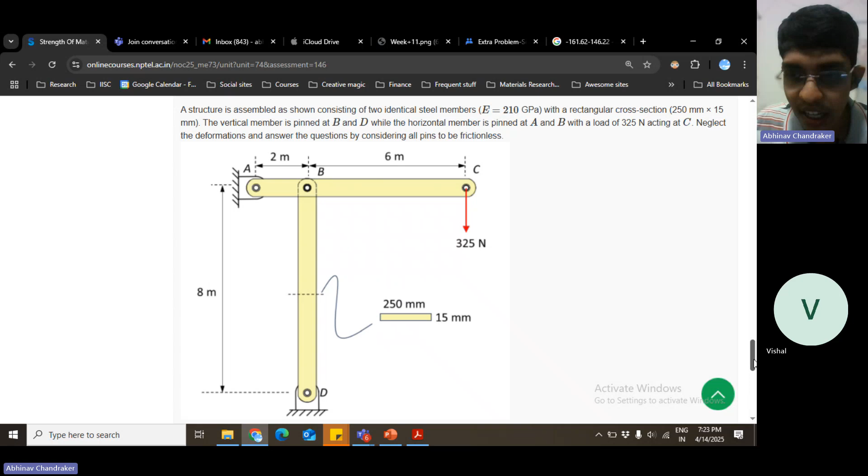Sir, I will solve it and send it to both of you, sir, to you and Archita. Please check what I have solved. You have sent the solution? No, sir, I will send it tonight. Okay, fine, you can send it. How will you send it, by mail? Yes, sir, mail. Okay, we will take a look at it. So this is your final assignment, so it's very important, right? Yes, sir. Okay, then we'll take a look. Just mail it to us. That's all. Anything else?